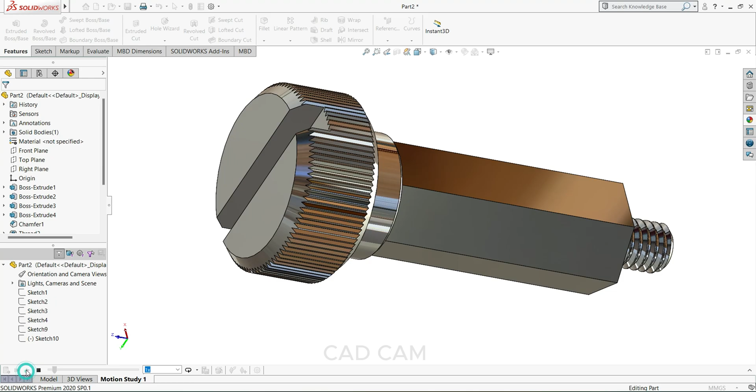So in today's tutorial we are going to make a thumb bolt in SolidWorks with the help of a 2D drawing. Here is the drawing.

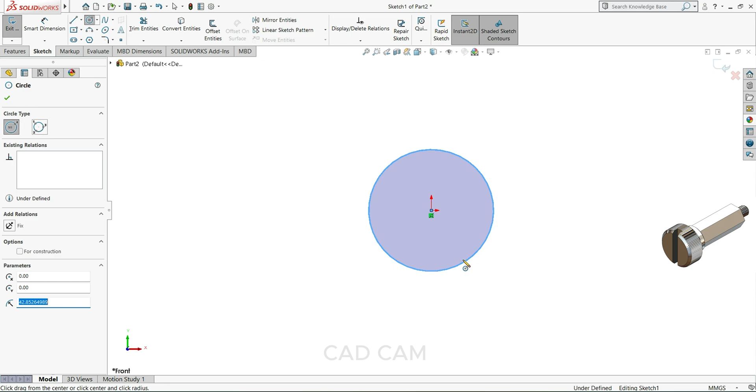So let's create a sketch. We'll select front plane, sketch. Then select the circle here. This dia we will keep 15 mm. Okay. Then extrude up to 7 mm. 7. Okay.

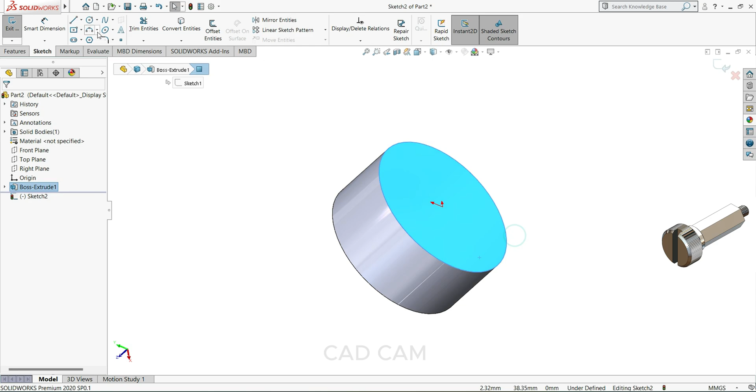Now select this face, sketch, and draw one more circle here with dia 10 mm. Then okay, then go to feature, select extrude boss base, and this time extrude up to 3 mm.

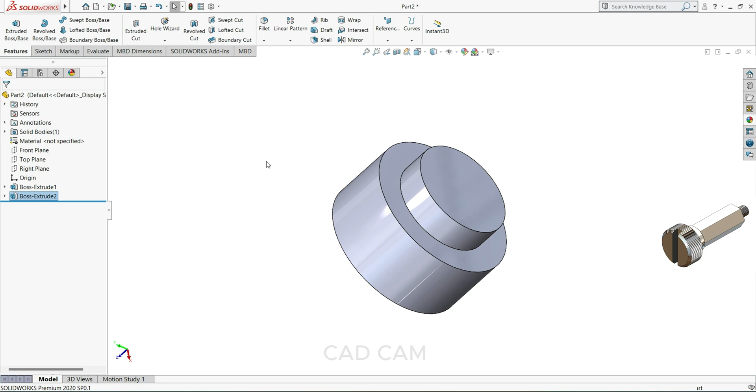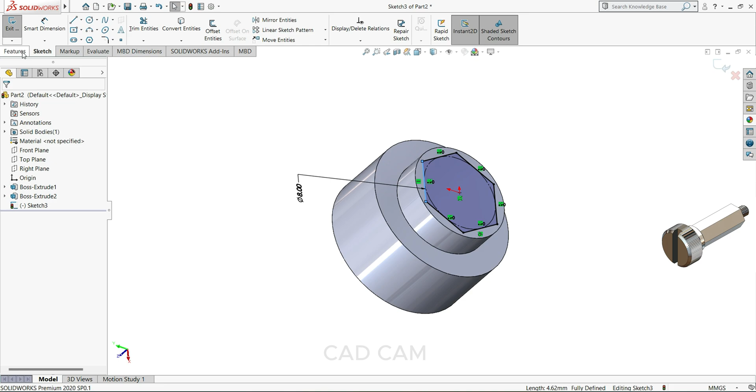Okay. Now again select this face, sketch, and select here polygon, parameter 6, and draw one polygon here. This dia we will keep 8 mm. Okay. Okay. Then select extrude boss base and extrude up to 20 mm.

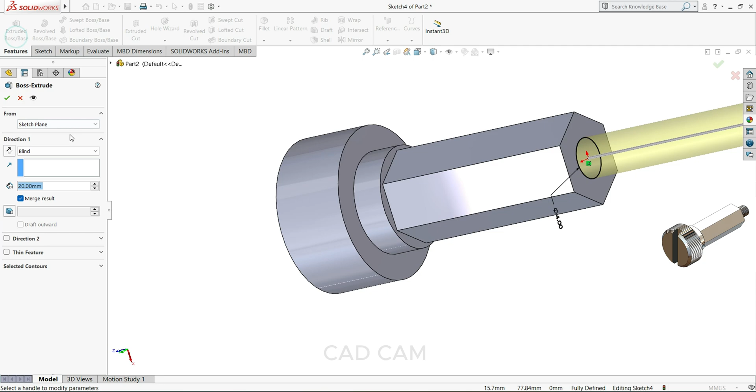Okay. Now select this face, sketch, and draw one circle on this side with dia 4 mm. Okay. Then extrude up to 5 mm. Okay. So our body is ready.

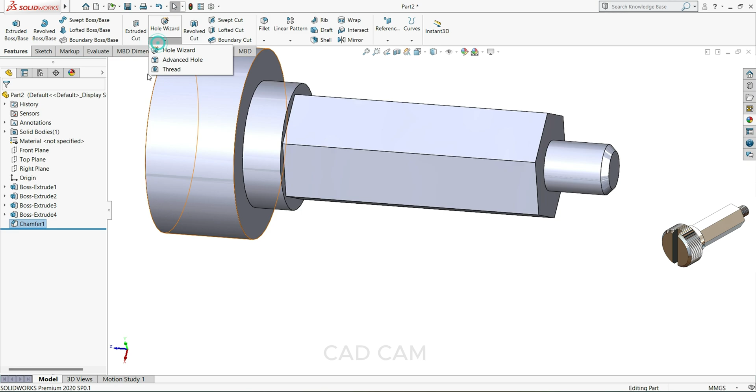Now select this face, chamfer 0.5. Okay. Now we will cut thread here. So select your thread, and the starting point we will select here, and for the ending condition select this body, select your offset 2 mm and reverse direction, metric dia M4 thread. Okay. Okay.

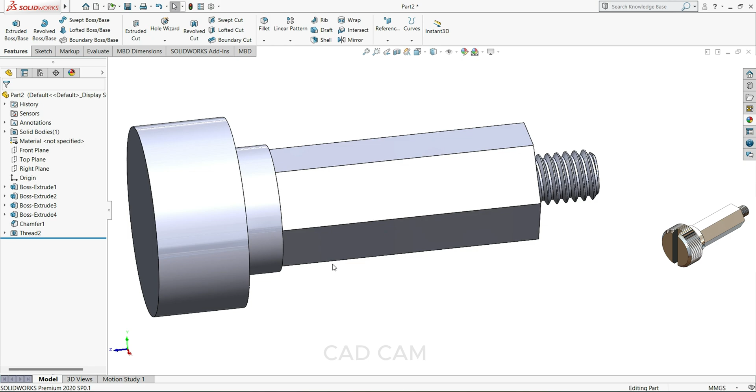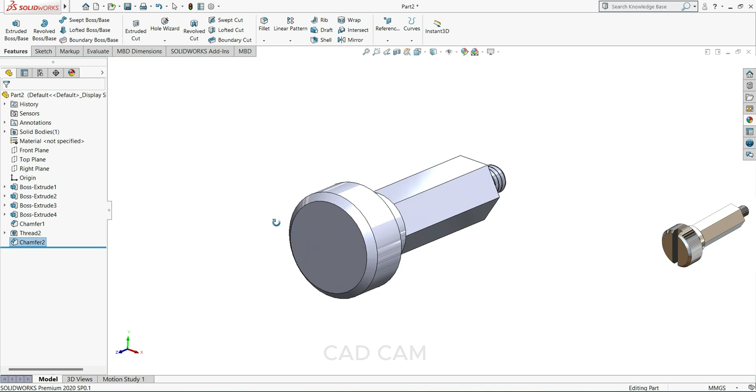Now select this face and select here chamfer 1 mm, and this side also 1 mm. Okay. Now select this face, sketch, and make it normal. Now select your polygon, and this time the parameter we will keep 3, and draw one polygon here.

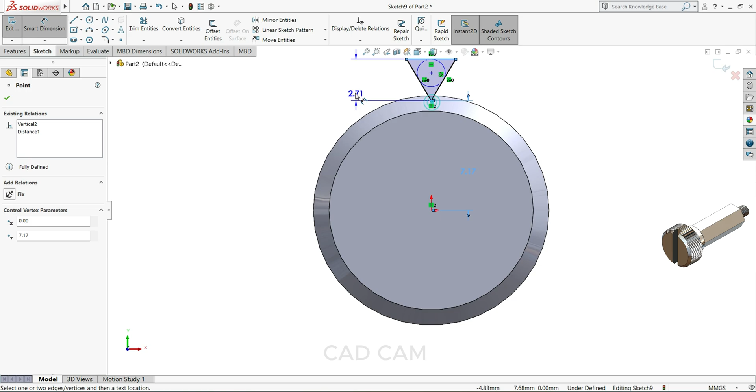Okay. Select this line, make horizontal, and for this point press Ctrl, and this point make vertical. Okay. So here to here we will make 7.17. Okay. And length, okay, 0.5. Okay. Now select your extrude cut and 7 mm. Okay.

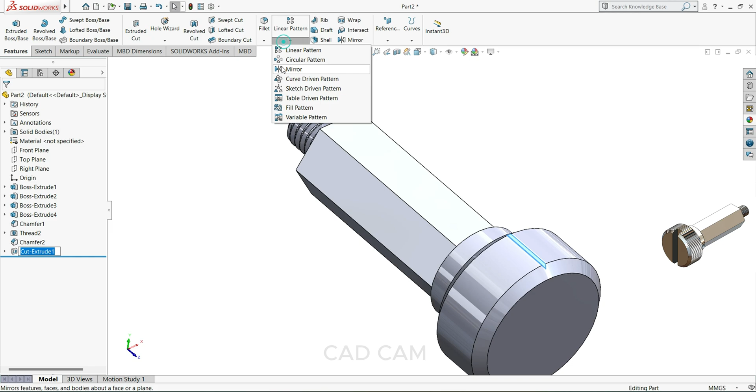Now we will use a circular pattern to apply this feature all over the body. So select here extrude cut and select here circular pattern, and for the direction we have to select the body. So we'll select this side like this. Pattern we will keep 100. Okay.

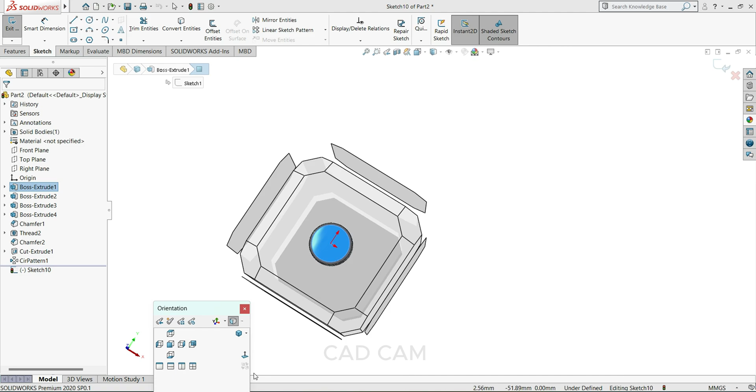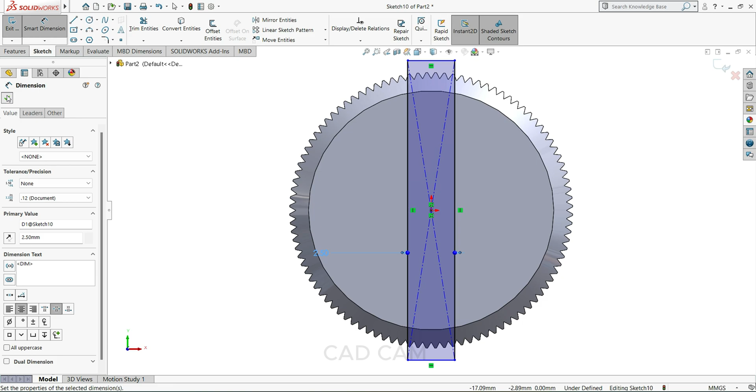Now just select this face, sketch, and make it normal. So select a center rectangle. Now we will cut a slot for the screwdriver. Okay. So width, select the width. The width we will keep 2.5. Okay. Then select your extrude cut, and we'll make the cut up to 2.5 mm.

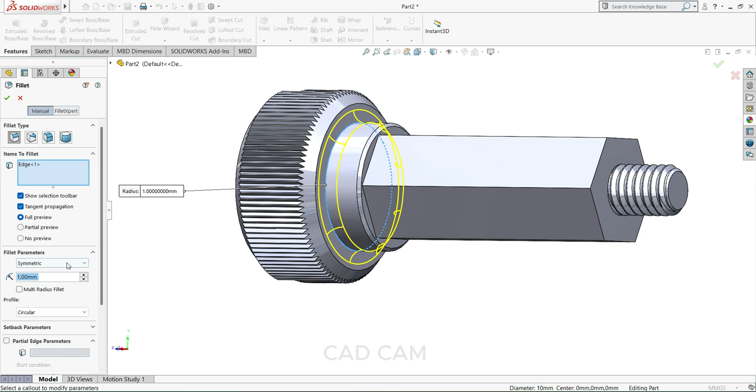Okay. Now select this circle and select here chamfer. Take 0.25. Okay, and select this face and fillet 0.50. Okay, so now our bolt is ready. Let's define the material. Okay, so our thumb bolt is ready.